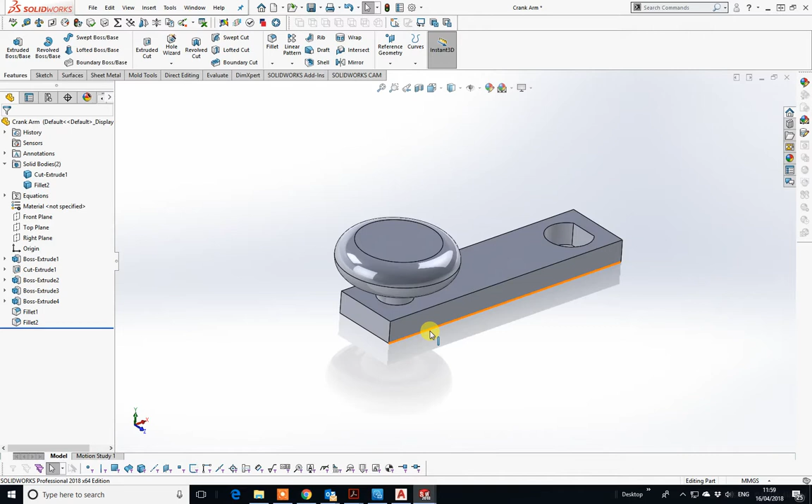So to start with, I am actually going to use this as my template. So like last time, I'm going to do that. You need to really get onto your measurements with this to try and understand.

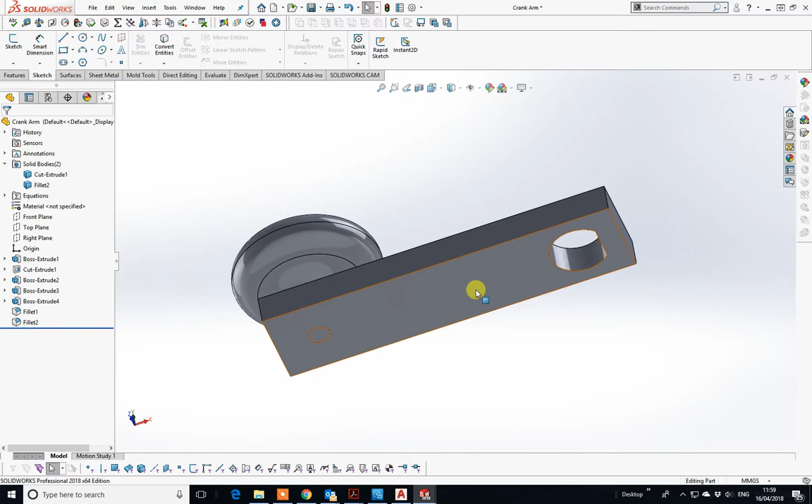So go to sketch. I'm again going to use the underside of this, but I've got to be careful how we do this. So if I go wrong, at least I can actually correct the mistakes. So click on that base there and sketch, and I want to go to convert entities, and I'm going to convert that and that.

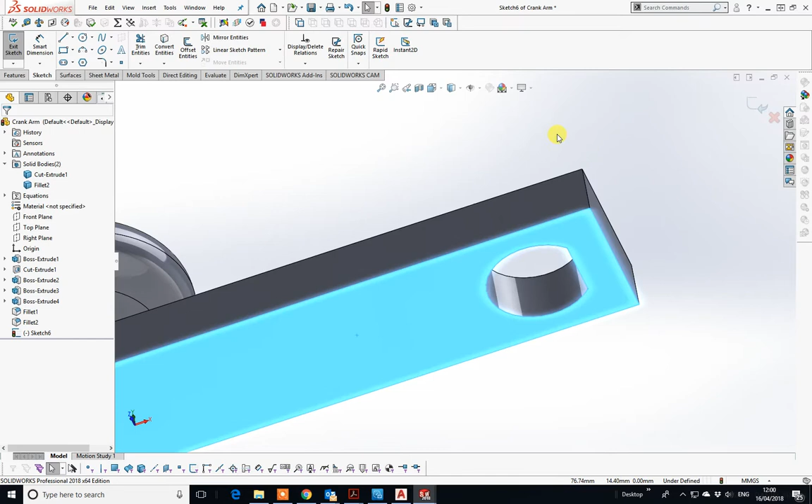Actually, what it's done there is the outer side. So I'm just going to Control Z, click away, Control Z, go back to convert entities. I want to pick that line there and that there. Okay, you can see that's now gone black.

So what distance is that? Now you'll notice at the top there, this actually has a dimension that is not on here, but I guarantee that it does actually fit. So that height, you want it so that little chamfer at the top there, the 45-degree chamfer actually sits above, which is

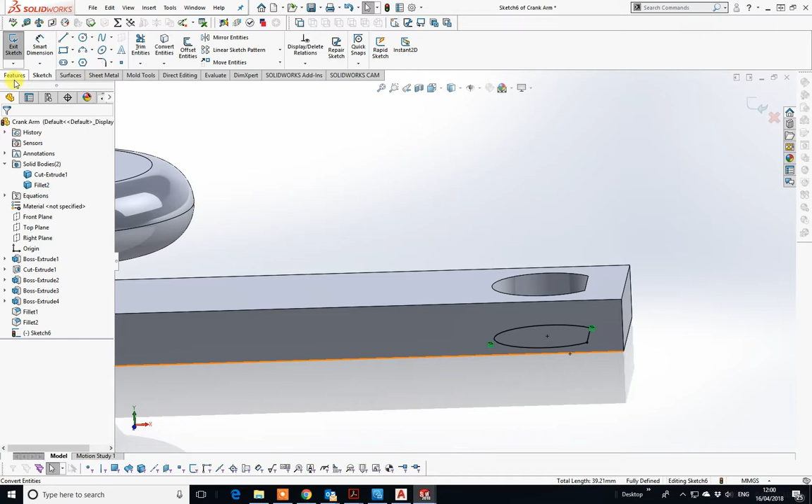And I am going to go up to surface. So up to surface, click on that surface there.

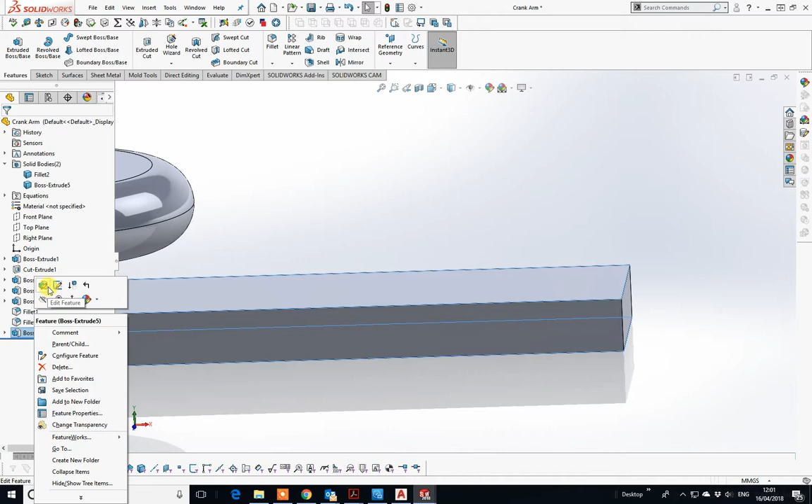Okay, now what mistake did I make? Let's go back in. So right hand click, let's go edit feature, and you'll notice that I actually have the merged results. So if I unclick the merged results, click, it appears again. So that is unmerged. Now what I am going to do, which actually makes this a little bit more difficult, and I'll show you why in a minute.

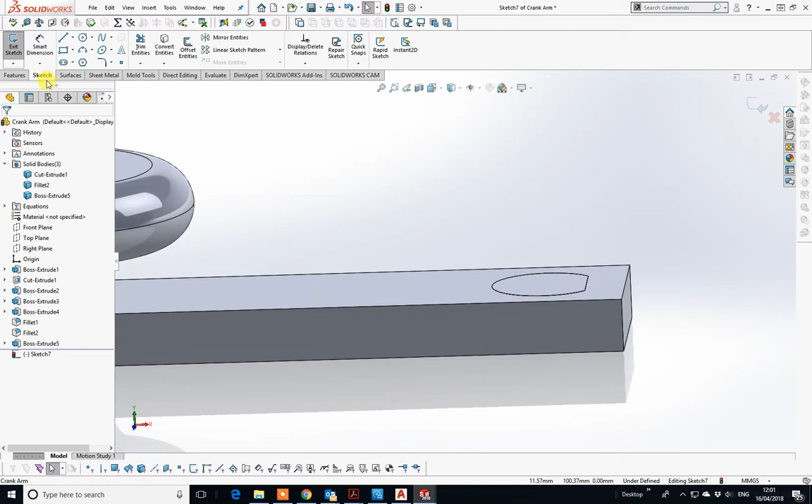So if I go to features, now just go with me on this one, extrude boss base. If I just click the top of that, it's not going to do it. So I need to go to sketch. So I go to convert entities. Let's convert. I just want that top surface.

Okay, and I want now to features, extrude boss base, and this time I want to merge. Okay, and I want to merge, I want to go up by 0.79, and that's the amount I need to go above.

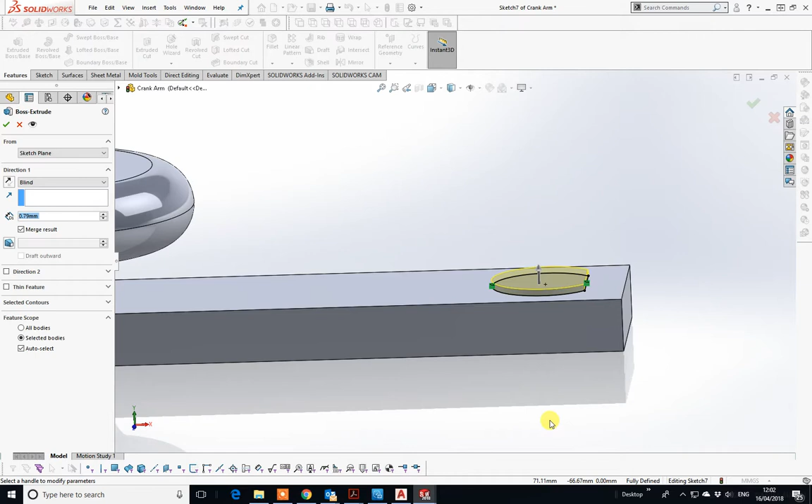So I've got that far. Now I know that the distance from the top there, I can do the rest. So let's just tick that. Let's go to my design tree, and I'm going to hide.

Right. Okay, you'll see what happened. I need to go back in and edit that. So edit feature. Now you'll notice here the feature scope. So when I actually merged that, I got it to merge together.

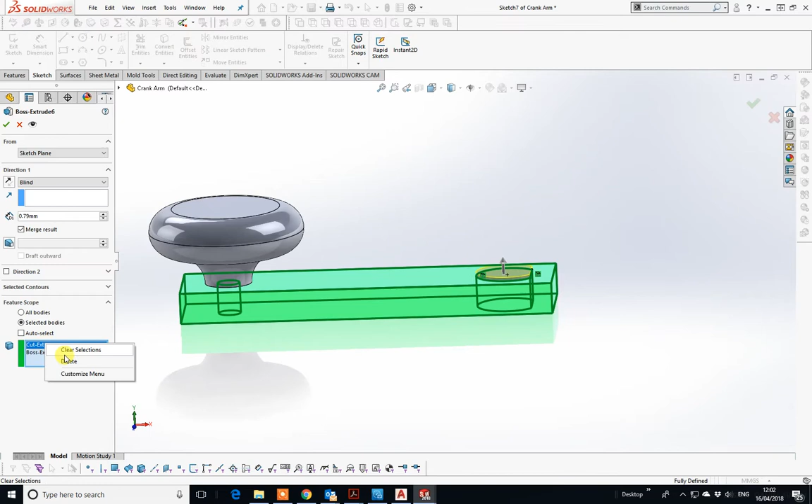So what I want to merge, so that there I don't. So I'm just going to delete that out of there and tick that. And you'll see now that my bodies has gone to 3. So that one there. So what I'm going to do is just hide the rest, just so it doesn't confuse any issues.

Let's just hide that. Okay, so there's my little part there. That's the fillet, and I know it's 0.79 up. So now, what I'm going to do is actually create a plane below.

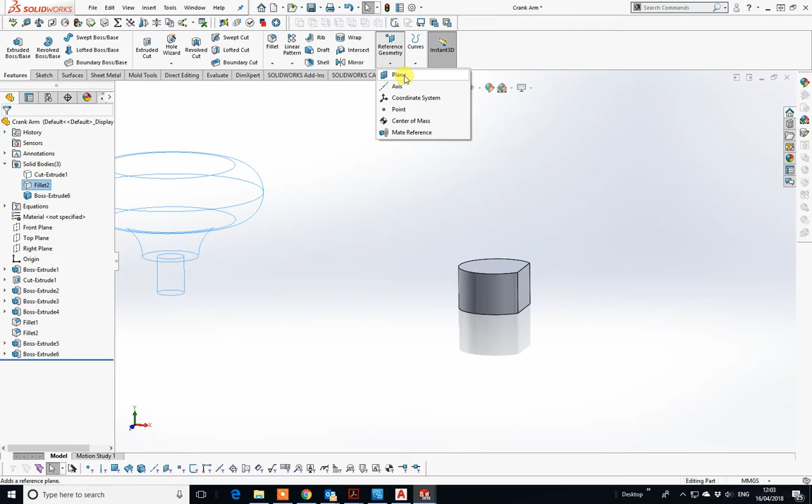So if I go to sketch, so features, and I go to reference geometry, and I say plane. Now I want to create it. So first reference point is there. Okay, but I want to do it in a reverse to that. So I want to flip the offset, but I want that because I've seen my distance, that's 38.10, 38.10.

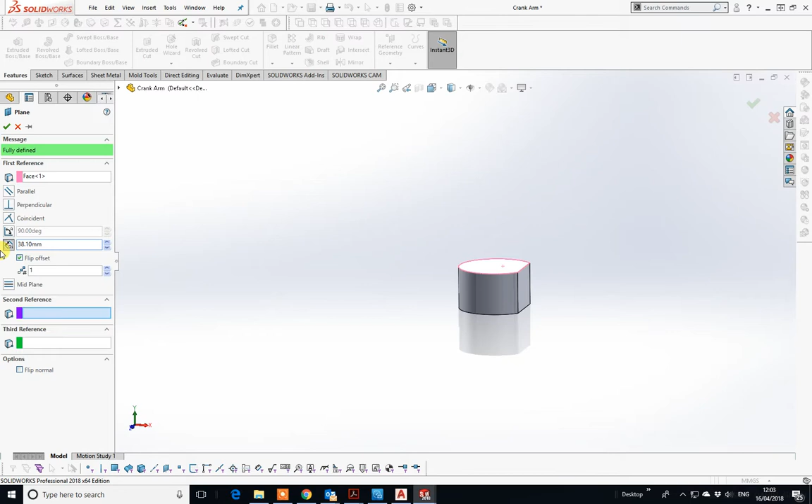Okay, this will get confusing. So if I just zoom out a little bit, it's down there. So I've ticked that. Right, I now want to sketch. I want to sketch in that plane. You see it's highlighted already.

But what I want to do now is actually draw a circle this time. So features, do a circle in that there.

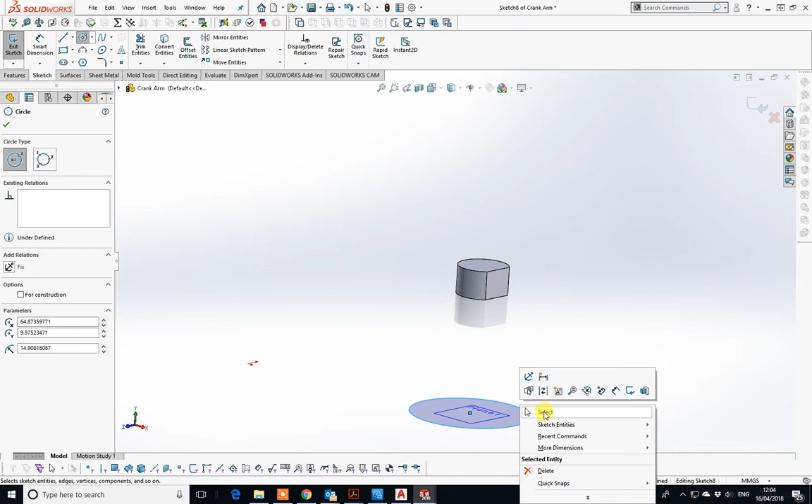Okay, now if I'm lucky, you'll notice my UCS is over there. This is when it gets a little bit complex. So I actually want that to pick up on the centre mark there, so I can just move it around. So I know that is centred to that circle up the top.

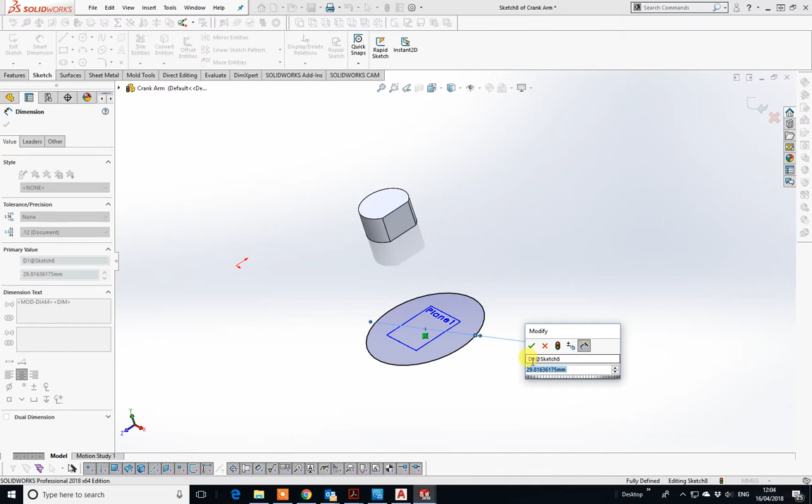I also want to give this a smart dimension. Okay, I know that my base diameter is 18.92, 18.92.

Now I also know that distance actually travels up 12.7. So I'm going to features. Well, I didn't check if that is defined. Just go to edit sketch. Yes, it's defined, that's fine.

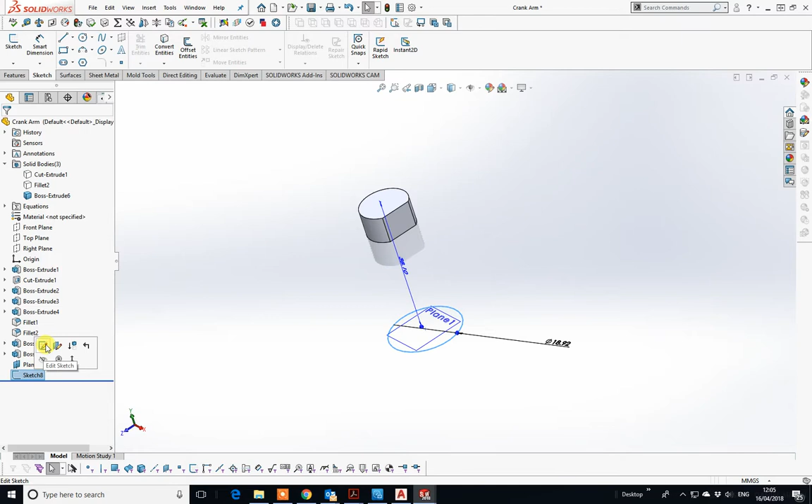So features, extrude boss base, and I want that by 12.7. Okay.

That goes up. Actually, that's an internal dimension, so that is not right. I actually want that to go up to 16.82. You'll see that on your drawing. It's just to confuse you.

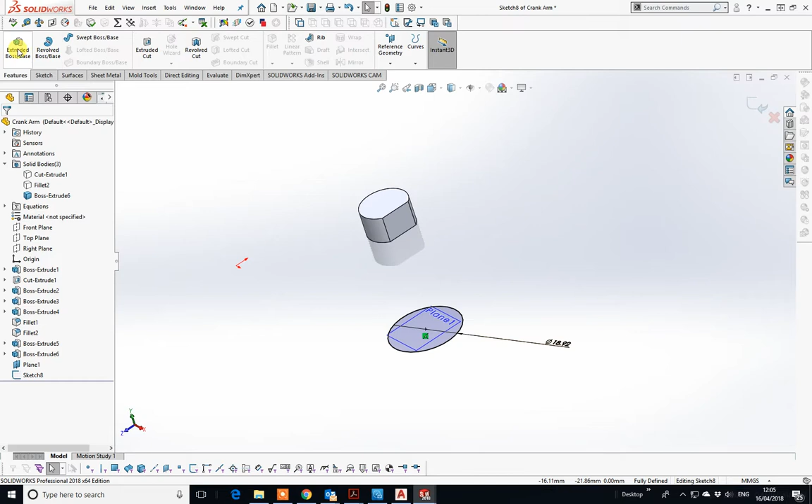Okay, that didn't do it, so let's just go away. So extrude boss base, 16.82. Now these points are actually quite critical.

So let's give that a little green tick. So we're getting close to our top. Now you'll notice also that I can extrude the rest of that down. So what I'm going to do now is go to sketch.

I'm going to sketch from there. I'm going to convert entities. So sketch and then convert entities. See, it's gone black already. And features, extrude boss base.

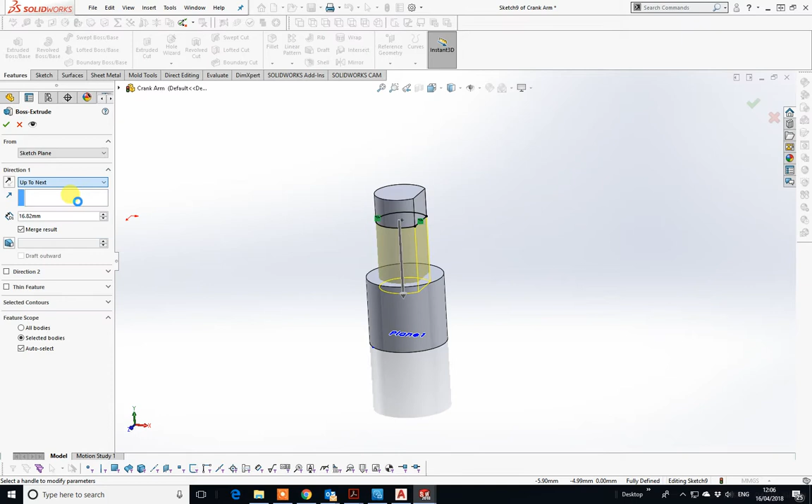Okay, and if I go up to next, perfect. I want to merge this, so make sure it's ticked. And there you go, there's my part. That is one part there. So you can see I've got the bases of it.

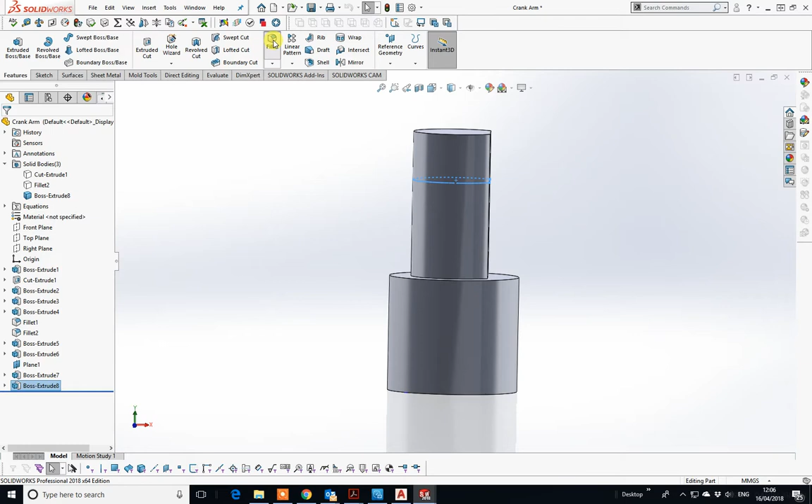Now what you also see is that we have a radius of 4.76. So if I go to fillet, okay, 4.765 I've got there. So I'm just going to tick on that one there.

And then, here's my mistake. I'm going to go back. I don't want to do that yet. So let's go away from there. I know that that is a distance there. So how do I resolve that one?

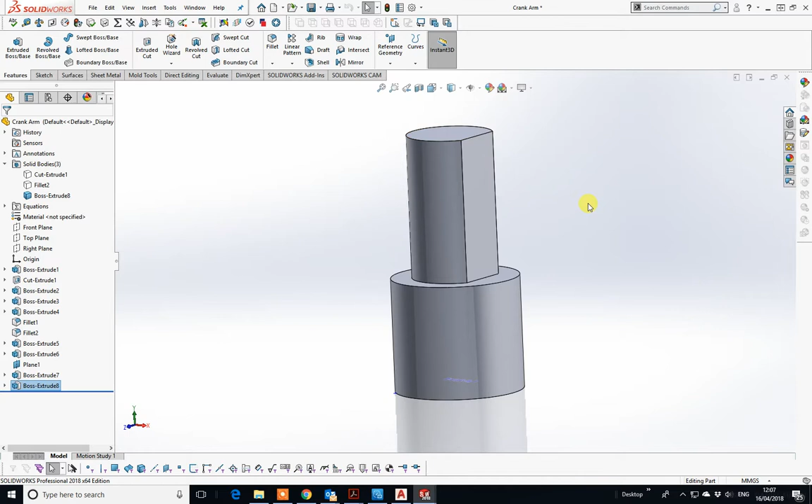So let's Control C, let's just go back, Control Z. Okay, I can't, or you can use your back feature, which I can't actually. So what I'm going to do is my last extrusion, I'm just going to delete because I know it doesn't affect anything. So I'm back to there.

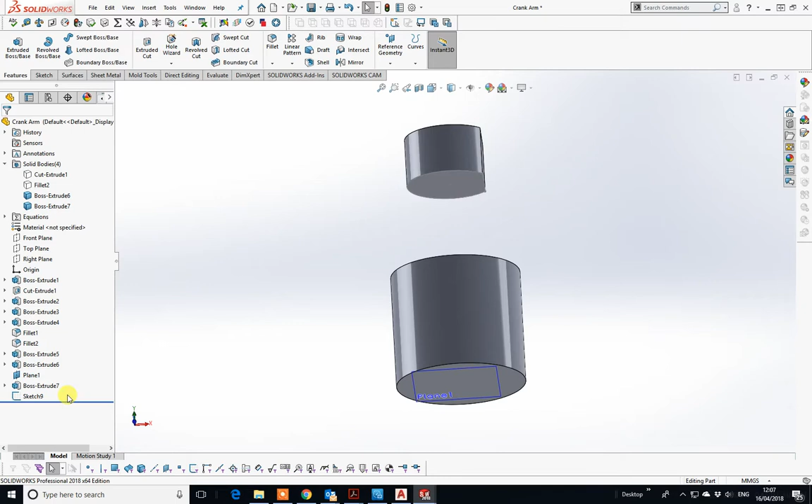Right, go to that sketch and edit that sketch. I said I'd make mistakes in this one. I'm actually going to slice, trim that off. Okay, and I should be able to bring that around so far. Okay, this might not work.

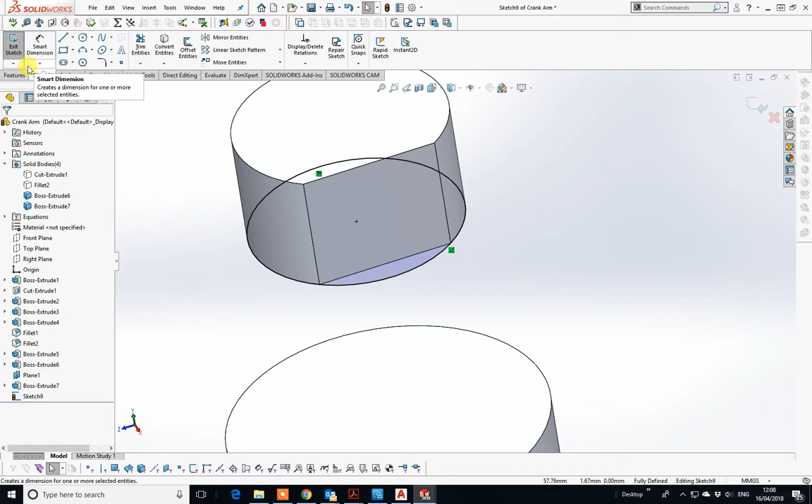Okay, it has worked. I'm now going to go to features, extrude boss base the same as I did before. That goes down, merge results. I could go down the distance, but I'm just going to go up to next. There we go, it's all merged, one complete unit.

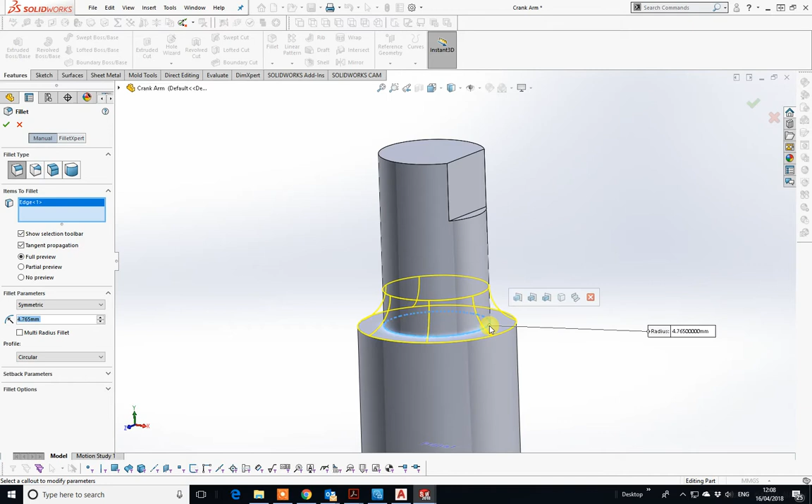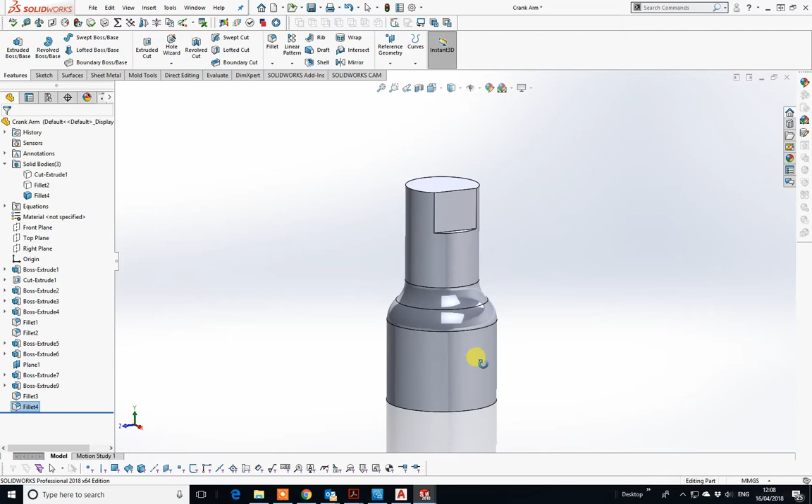Okay, you can see that from the top. I'm now going to go to my fillet of 4.765. If I do that one first, what happens? Okay, if I now go to repeat that fillet on that one there, you'll see that I actually have my crankshaft in there. So now that's that part done.

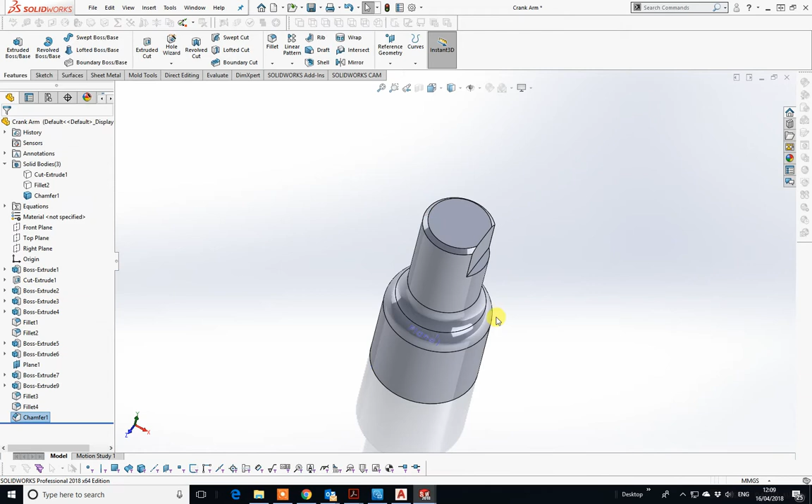I'm probably going to have difficulty at the top here because I can actually put a chamfer of 45 degrees on. So I'll go to chamfer and I type in 45. I don't know what that distance is. Well, it's 0.79 down, so it's 0.79 in. So if I just put in 0.79, okay, and then I click on that line there, okay, it's actually done it for me. So that's the top part done.

Now you'll notice also that I actually have a hole in the side of 2.38. Now to do that, I want to do it off this face, but I don't. It doesn't really matter what distance, but it's the easiest way to do it. Or I can just do it off any other plane. So I could probably just highlight the plane I want. That's way too far, so I'm going to put another plane in.

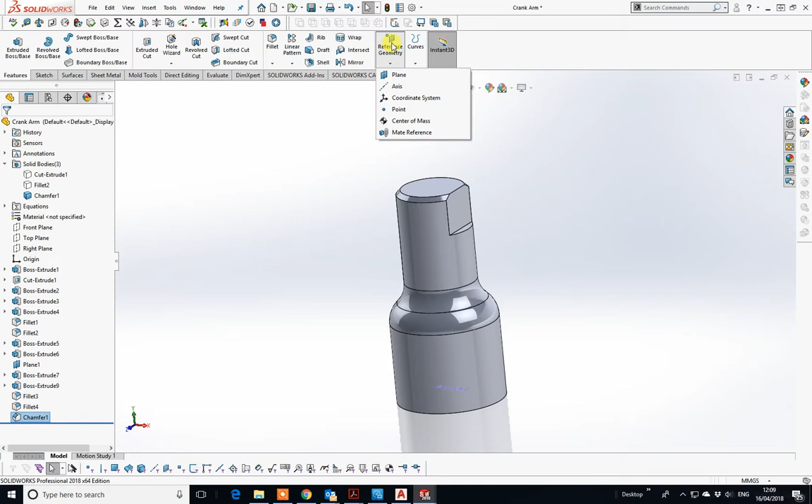So go to reference geometry, go to plane. I'm going to click on that plane there. That's 38 points, I'm just going to put it in 10 mil, roughly. Okay, I could put it on that face there, but I need to show you how to do that in that sense.

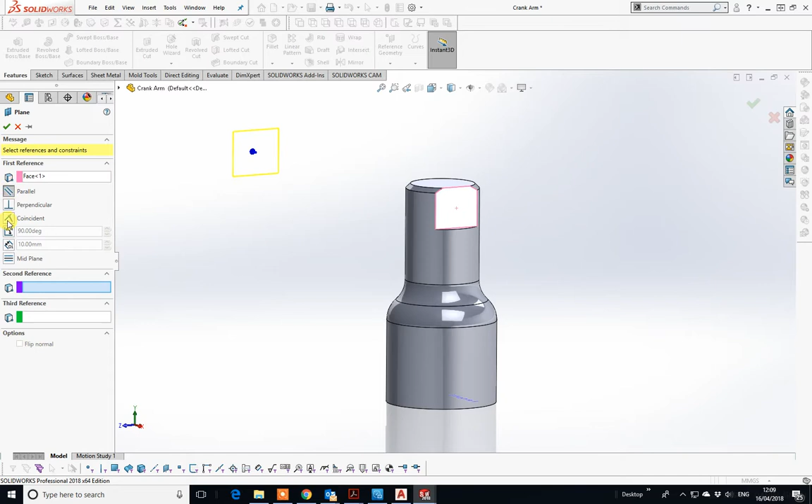Or parallel to. No, I'm not going to do parallel to, perpendicular to, no, coincident, that's what I wanted. Coincident that face. I could just do that and do the circle that way, but I'm not. So I'm just going to go back here, just do that once more.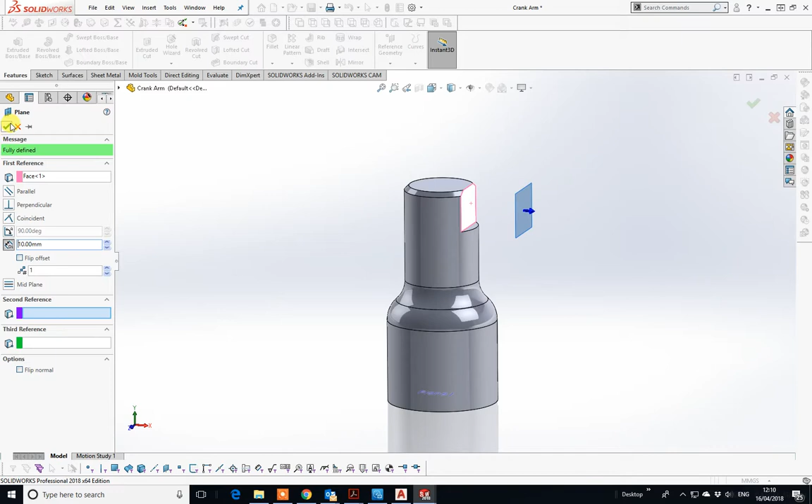I want to do it as an offset of 10 mil. Now that plane, if I just go on there, pulls all the way down on that. And if I click on that face, press the space bar, I can now go normal to on that way. So I'm going to draw a circle. Now I don't know how deep that circle is, but I know I can almost go to the centre line.

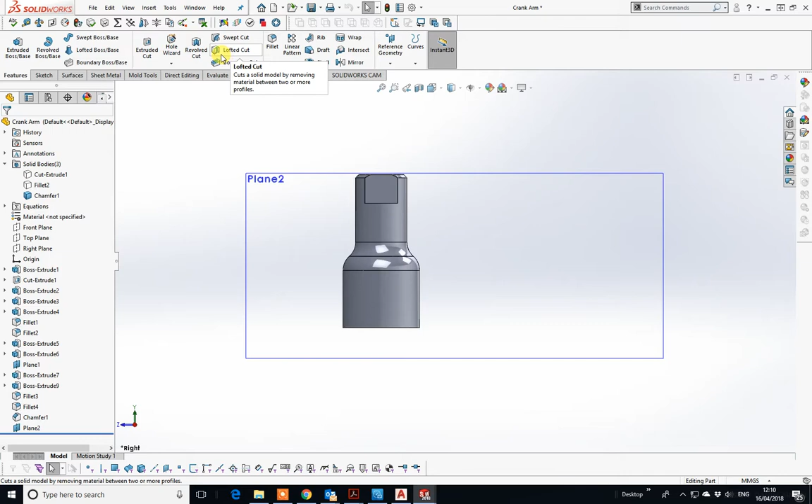So what I might do first is actually put, having set that up, the other one. So I'm going to draw in here, another circle. I've just got to get this absolutely right to achieve this. Just get my drawings right, and away we go. Here we go, just one second.

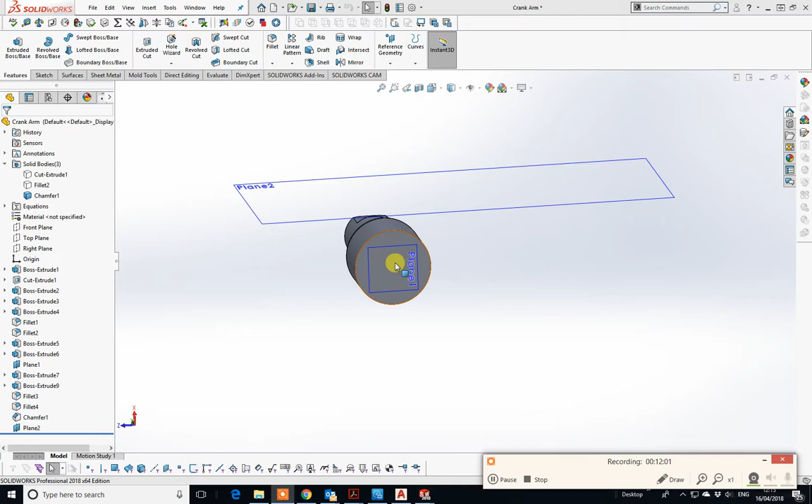Okay, if you look at your drawing, you'll notice in terms of the actual flat for the base here has to be on the same side. So if we go to sketch, there we go, I'm going to click on that face and I'm going to draw that other circle from the center point. It picks up automatically. Now that's interesting. Let's just select that.

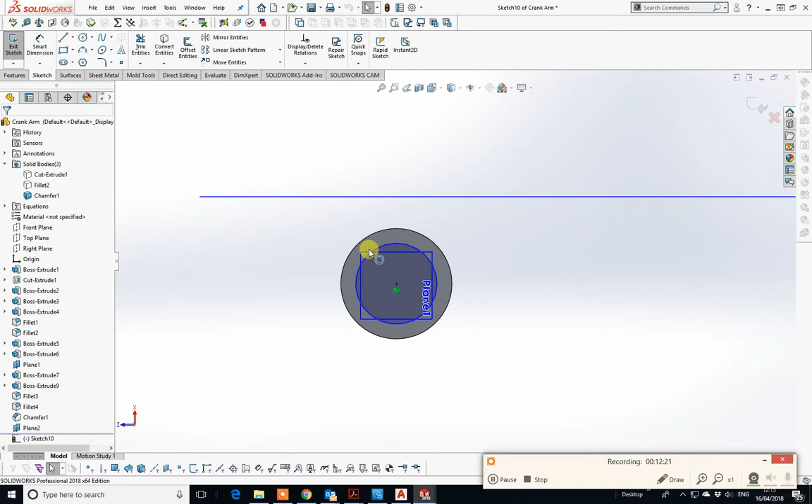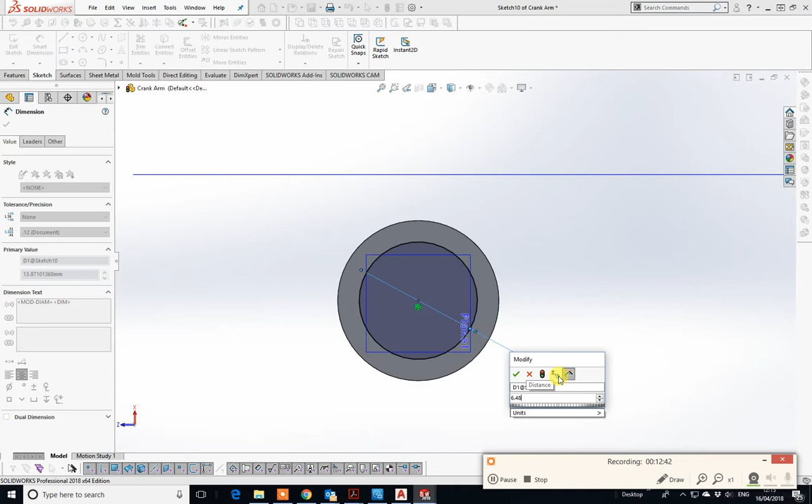Okay, once there, that's fine, and give that dimension. And the dimension you should have there for that inner, so radius is 6.48. So we shall put in 6.48 times 2, 12.96.

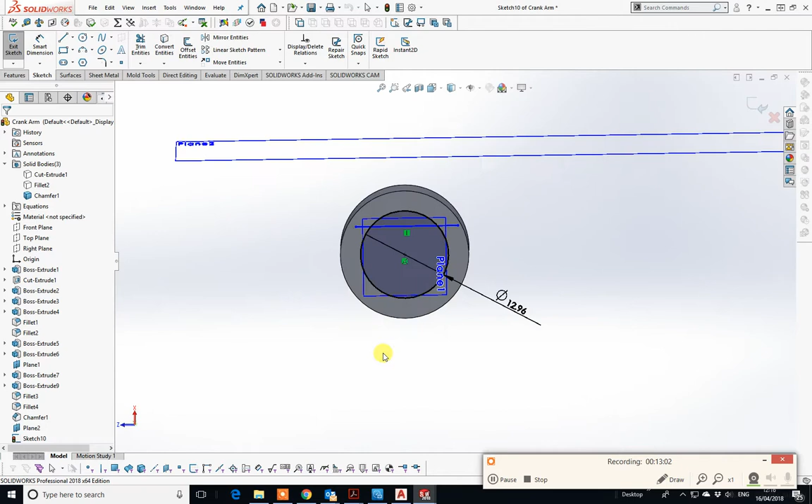And again, if I just bring that down a bit, my flat needs to go on the top there. So just draw a line across there. Now I know if I look at that, that is horizontal, and I know from the centre it is 4.89. Just double check that, so smart dimension from there to there is 4.89.

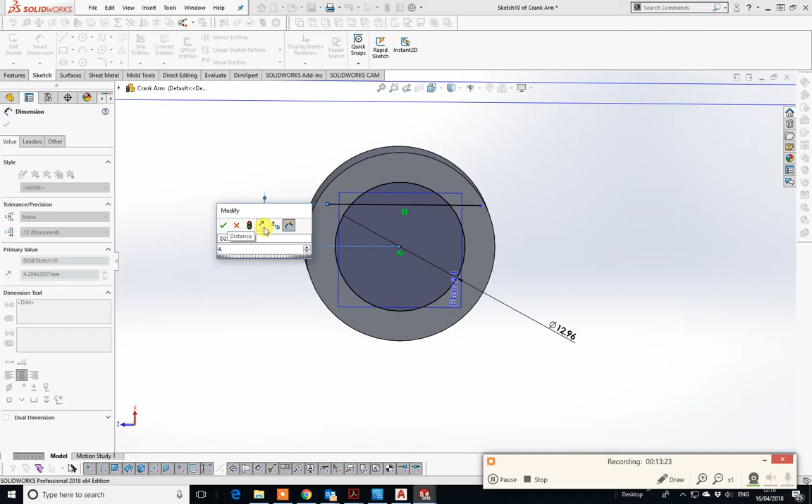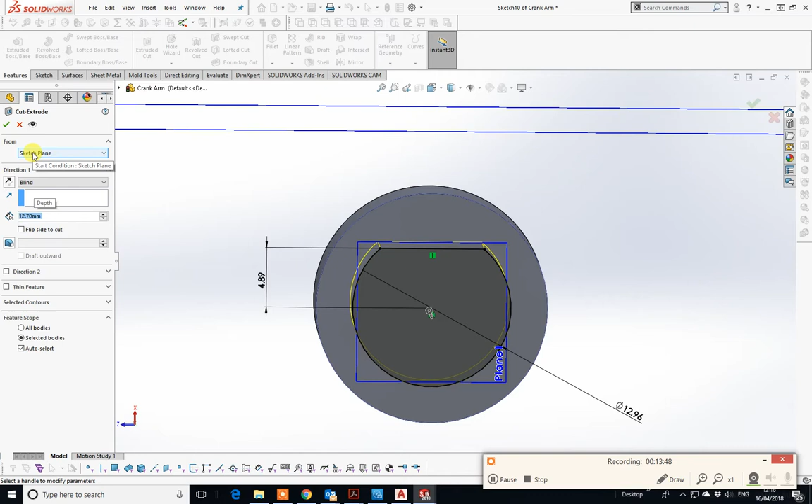Okay, and I'll go to a trim. Okay, and go to features and extrude plus extrude cut. So I'm going in, and I know that is 12.7. So let's go in 12.7 and give it a tick. There we go, there's my inner cavity.

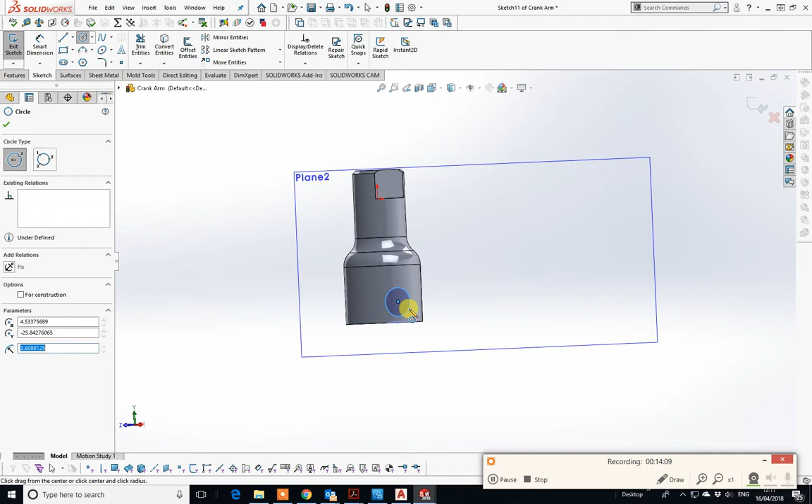So let's go back to that hole we've got to put in. So go to sketch, sketch in this plane here, and I'm going to draw a circle roughly about there. Okay, you know it's not in position. I need to get that into position because it's got to be on the center line. So if I just go to my line tool, go to center line, and see I've got center point there. Let's just pick it down there.

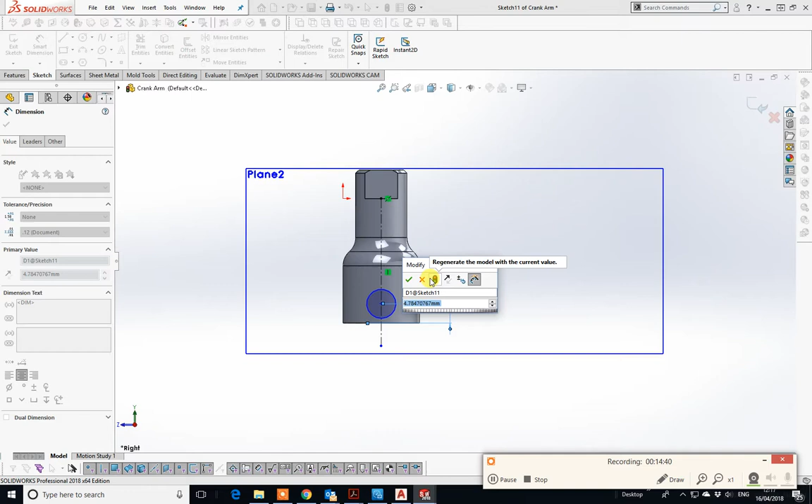Select and move that across, and then take another smart dimension from the base there to that center point there, and that should be 6.35. Okay, and one more. That diameter is 2.38.

Okay, and I still don't have that as fully defined because it's blue. So what's going on here? So I can pick it up, move it. Right, if I hold the shift key down, having selected that center point, and select that line, and then I want to create a relationship between that line and that point there, and that's coincident, and therefore it goes black.

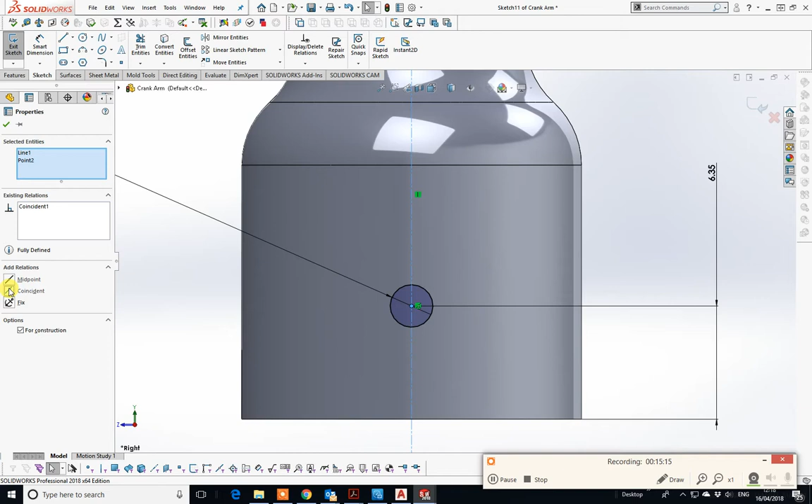Perfect. And now I just want to extrude cut, to features, extrude cut. Perfect. And do that there, and you'll see that hole has gone in.

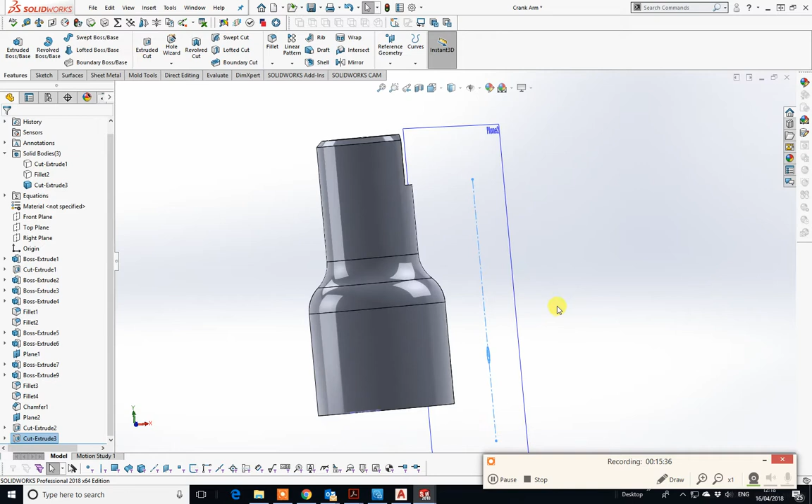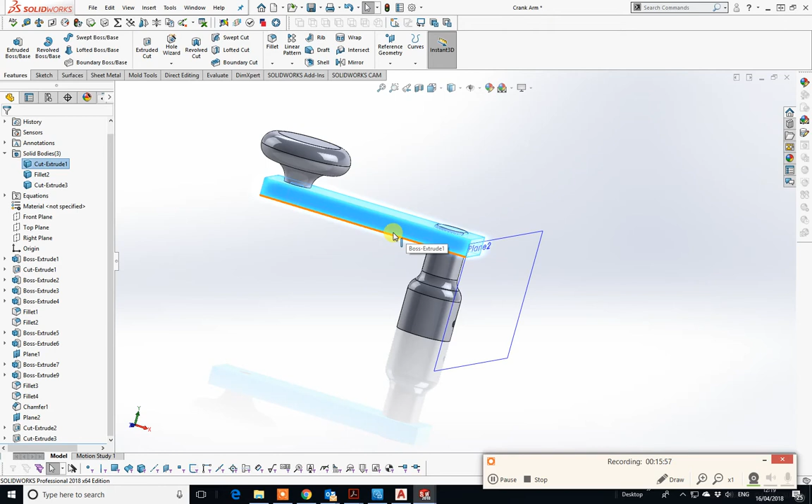So I think that is everything for the crank arm to be done. So one thing before I do, I'm just going to bring back the crank knob and the actual crank handle, and you can see how they all start to interrelate. And again, I will show you later on how to separate these out to actually put them into an assembly. Okay, until the next one.